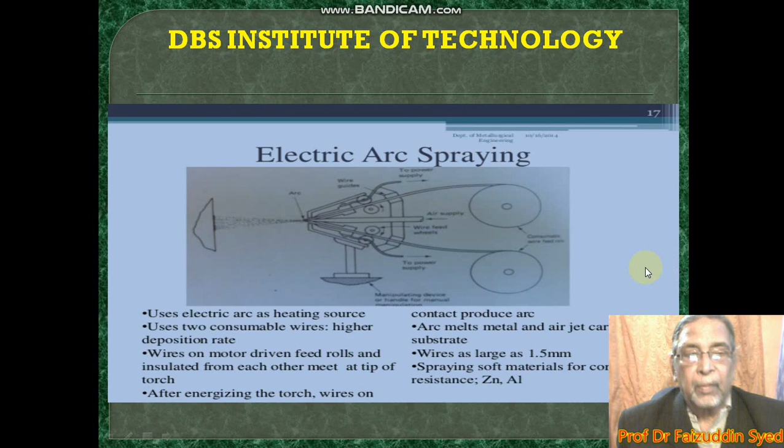This is a special plasma arc deposition process. This is a costly process. In this process we are using powder. The consumable powder will be melted and atomized in plasma. Here we are using tungsten electrode and argon gas. The maximum temperature in this process is 28,000 degrees centigrade. This process is mostly used for ceramics and other strong materials.

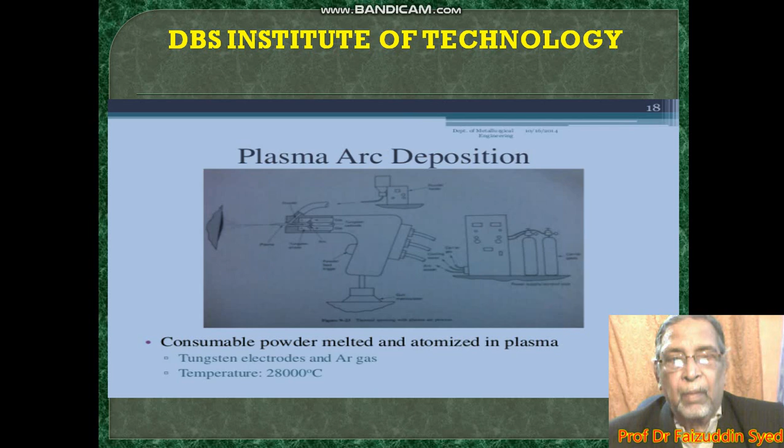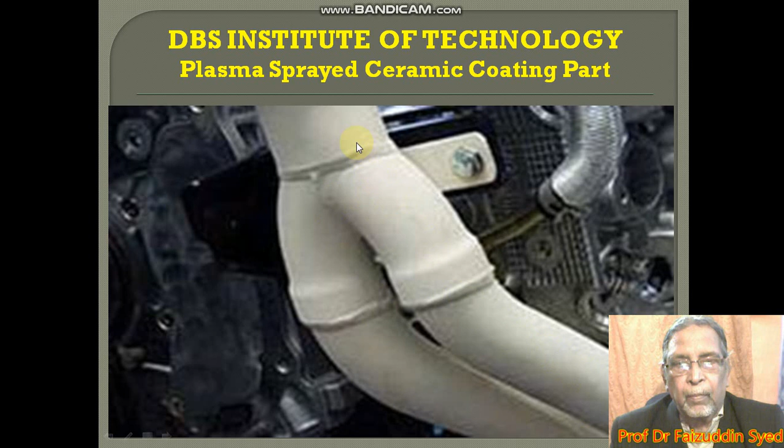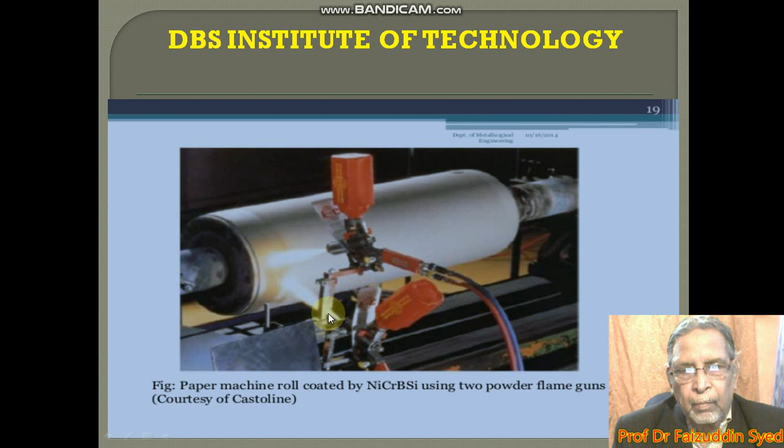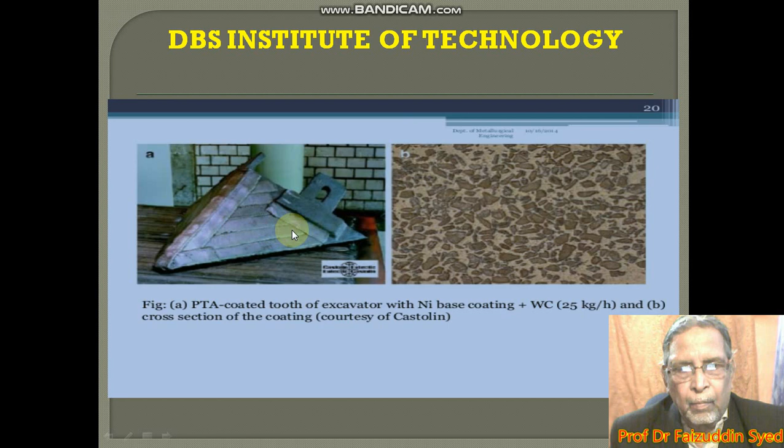Now we can see the evaluation of the coatings. Evaluation means we have coated a part with some material which we needed. After coating it, we need the coating to be excellent with good properties. So how will we know it? After coating, we can do destructive testing and non-destructive testing.

In destructive testing, we can do the tensile shear test. After doing this tensile shear test, we can find if it is a good coating: the bond strength is greater than X, that is the tensile strength of epoxy. For non-destructive testing, we can do visual inspection. We can see the porosities, impurities, cracks, etc. We can also do ultrasonic testing inspection and thermal imaging for this product.

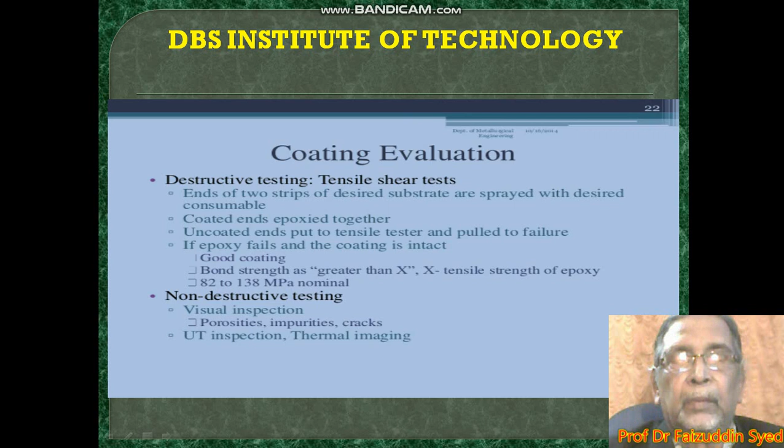We have seen different processes of metal spray coating. Now you should know the applications of metal spray coatings, where we can use them. We can use it for wear resistant coatings against abrasion and erosion. We can use this process for corrosion resistant coatings. We can use this process for heat resistant coatings. We can use this process where we need thermal insulation or conduction coatings. We can also use this process in electromagnetic shielding and medical coatings.